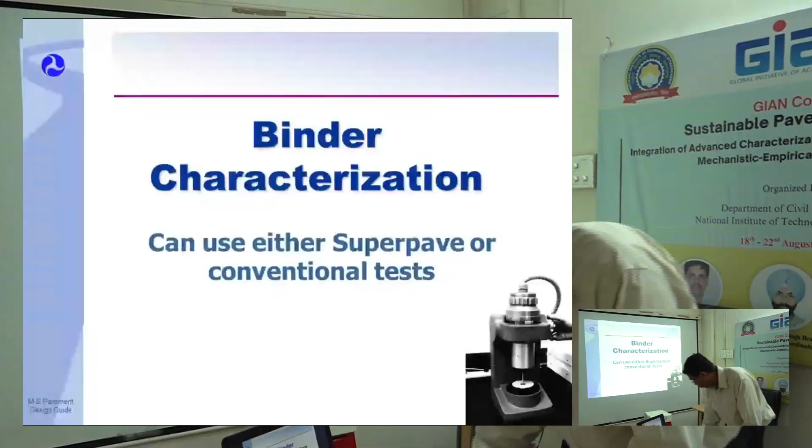Alright, I'm going to go ahead and keep going through the binder characterization. Here you have asphalt as viscous versus elastic - you have an elastic solid here, and a viscous fluid there. That's what you're dealing with in asphalt characterization, and A-VTS correlates viscosity with penetration.

Both viscosity and penetration, it is dependent on temperature, rate of loading, and aging. As temperature increases, viscosity drops. As rate of loading increases, the viscosity or stiffness increases, and aging affects the binder viscosity-temperature relationship.

How to convert binder stiffness data at different temperatures using equation 2.0. Here, A-VTS - there is a simple viscosity equation for temperature susceptibility. And here, dynamic modulus - I'm going to explain this in detail.

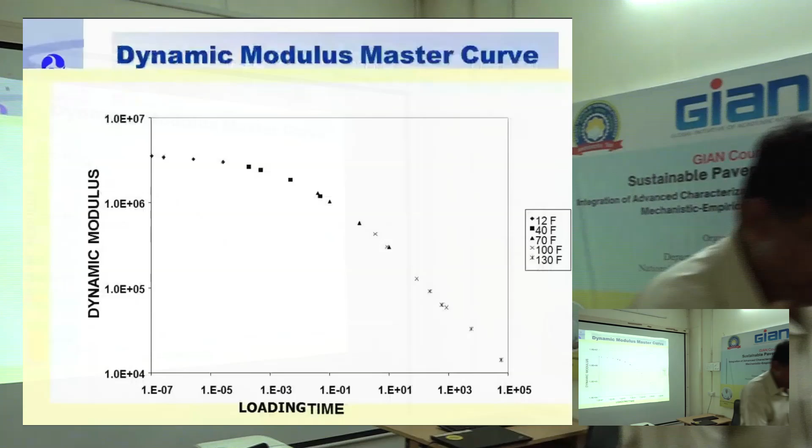All right, dynamic modulus is a very important test. This is done for hot mix asphalt, HMA, at different temperatures. What you do is there's a sample of asphalt concrete. I don't need any confinement, it is not going to fall apart. And you apply vertical load, there is no confinement at all.

What you do is you apply load at a certain frequency, continuous load with frequency or time. And then you have a sine wave, it's going up and down, and you're applying that load over a certain amount of time. Then there is going to be strain, and there is going to be some lag, following the same pattern.

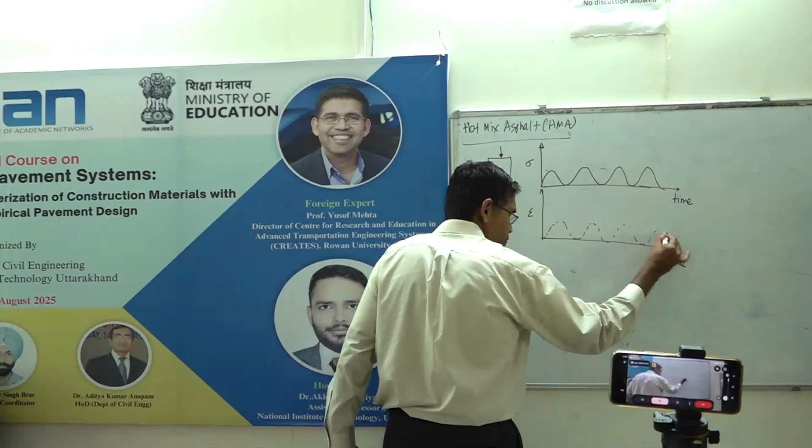So what you will see is the dynamic modulus is given by, at any point, sigma over this. E star is given by sigma over epsilon, stress over strain. That's your dynamic modulus.

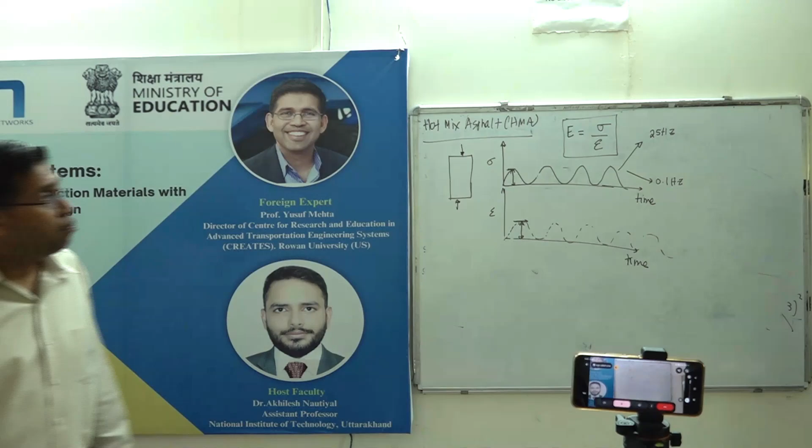What happens is you run this at different frequencies. This can be run very fast, all the way to 25 hertz, and as slow as 0.1 hertz, at different temperatures: 12 Fahrenheit, 40 Fahrenheit, 70 Fahrenheit, 100 Fahrenheit, 130. This is for heavy traffic, fast-moving traffic, and this is for standing traffic, 10 seconds give or take. 0.1 hertz is 10 seconds.

So you have to do this test at every temperature at different frequencies. There's a software, you put it in the machine and you will do that. Now, when you do this test, right here I'm going to plot with hertz frequency, from 0.1 hertz to 25 hertz, and then you have the E star line.

So if I do this data set, at very high temperatures, very low temperatures, asphalt is going to be very stiff because our binder is viscous. But as the frequency goes up, it becomes stiffer and stiffer. At lower frequency it flows. So at high temperatures, it's going to look like this, at 0.1 hertz. This is by frequency, but I can reverse it into time.

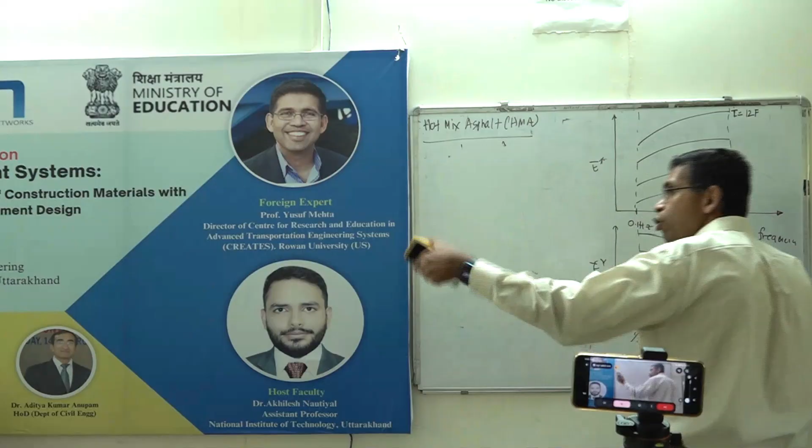1 over 25, 1 over 0.1, and right here this will show exactly reverse, same temperatures. This is 12 Fahrenheit, and all the way, I'm not going to plot all of them, to 130 Fahrenheit.

This is a project one, a level 1 requirement. You have to do dynamic modulus of hot mix asphalt. Now I'm going to explain this very important concept called time temperature superposition, what that means.

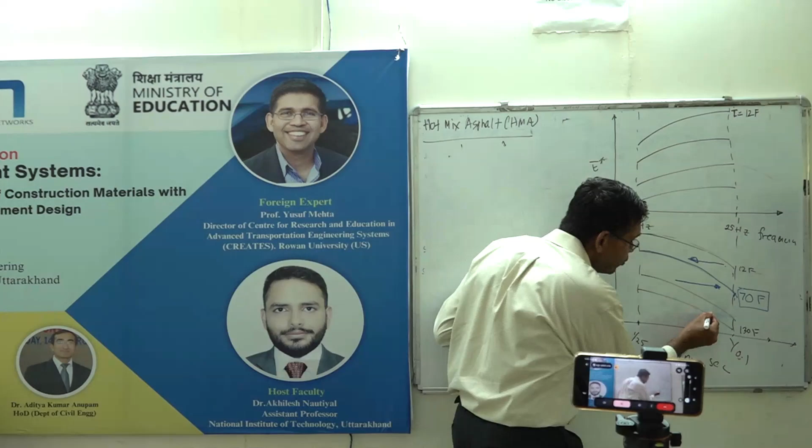Let's say that this is my reference, I'll pick 70 Fahrenheit as my standard temperature, baseline, reference temperature. This is the beauty of asphalt concrete. If I just move this entire curve to the left, because it is colder than 70 Fahrenheit, and move this to the right, because it is hotter than 70 Fahrenheit, does that make sense to you?

Horizontal movement, no vertical movement, completely horizontal. What you will see is that it is true, all of them will directly follow a very smooth curve.

That's what you see there. I'm going to explain the significance of this. It's a very powerful tool.

So I tested from different temperatures. This is my raw data. Everybody understand this? This is my raw data. But my shifted data is not raw data. I've analyzed the data, right? Now I'm going to draw this here.

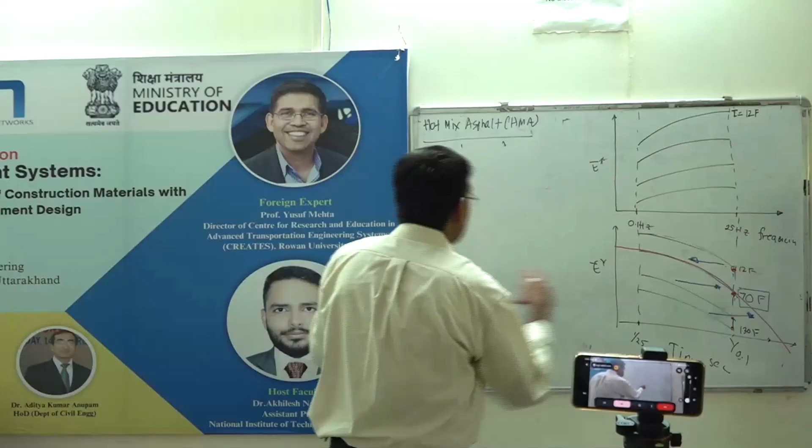Okay, so right here, I have data measured only between these two points, correct? Everybody with me so far? I've only measured between these two points, 1 over 25 Hertz and 1 over 0.1 Hertz, correct? That's the only real data.

But I shifted this left and right and I got this data set right here. Everybody with me so far? This is what temperature? 70. Only 70 Fahrenheit now.

Only one real data set exists between these two points. That is the real measured data. Now look at the beauty of this. Did I test anything, this is 10 seconds, correct? I did not test slower than 10 seconds. Everybody with me so far?

But if I extrapolate this, this could be as high as 1,000 seconds. Everybody with me so far?

If I did not go faster than 25 hertz, right? But if I went all the way, then this could be as much faster than 1,000 hertz. Extrapolated data. Look at the beauty of this. To test the material at 1,000 hertz is pushing the limits of the equipment.

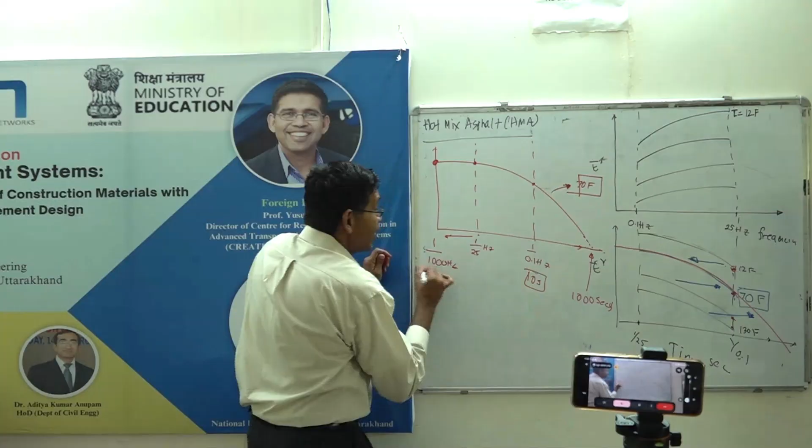Very expensive to do, alright? But I could be very smart by just measuring the material at 12 Fahrenheit. I can get the data of 70 Fahrenheit at 1,000 hertz, or 70 Fahrenheit at 1,000 seconds. That means I don't have to wait 1,000 seconds.

Remember, I can shift anywhere. I just took 70 Fahrenheit. I could have done this entire master curve at 12 Fahrenheit. I could have done this entire master curve at 130 Fahrenheit. Can everybody see the difference here?

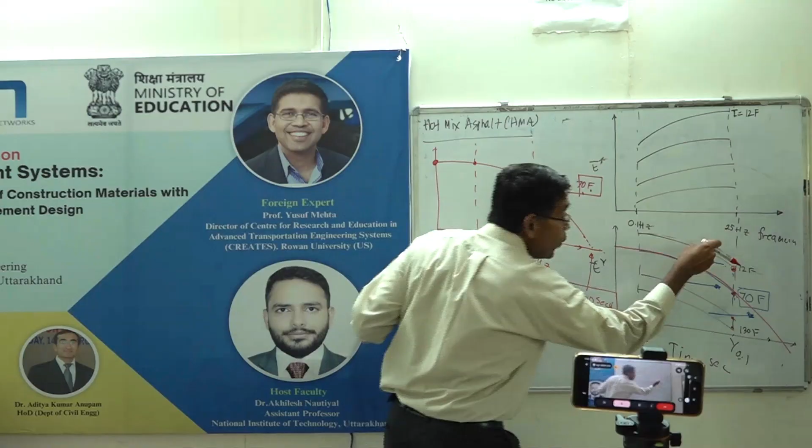So I have the ability to take any temperature, any frequency, just by doing a range of temperatures at a short interval. This phenomena is called time temperature superposition. I'm going to explain to you in a much more simpler fashion.

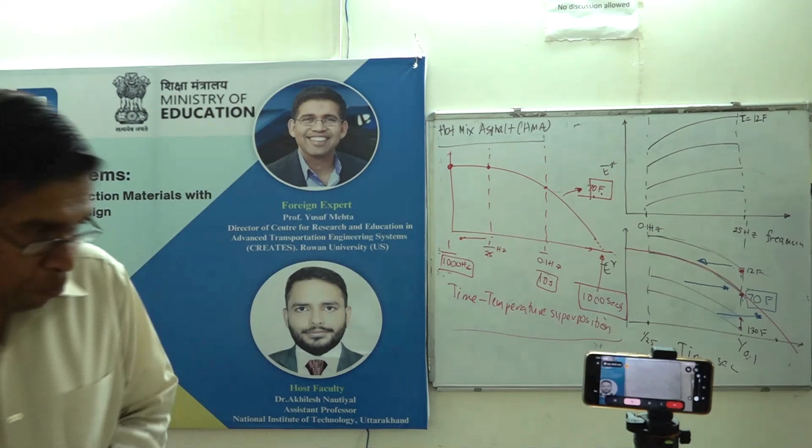Let's say what this means is this. I hope I can do a better job at this. If I take this material, 70 Fahrenheit material, I want you to physically understand what this means, and I load it for 1,000 seconds, it is going to deform a lot.

It's almost equivalent to heating up to 130 Fahrenheit. Same impact, as if I'm heating the sample, or if I stood on asphalt here for 1,000 seconds, is as if I'm lighting a fire under the asphalt.

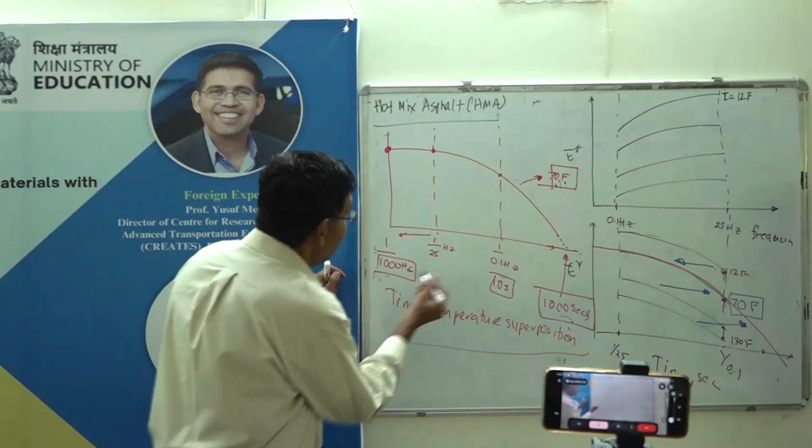That's what it means. On the other end, if I test the same thing at 1,000 hertz, it's equivalent to me doing what? If I test for 1,000 seconds, it's equivalent to me heating more than 70 Fahrenheit. What does this mean?

Very less temperature, yeah, cooling it. It's almost equal to cooling it. But look at the beauty of this, right?

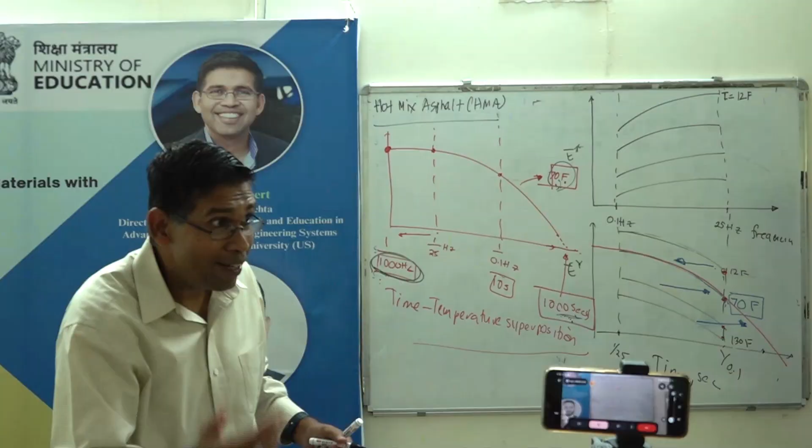I can also reverse the logic if I don't have a freezer, if I don't have a cooling methodology. So I can even go backwards and do the inverse. Like, okay, I don't have a freezer in my facility to put 12 Fahrenheit. What will I do instead? Test at the higher range. It's completely interchangeable.

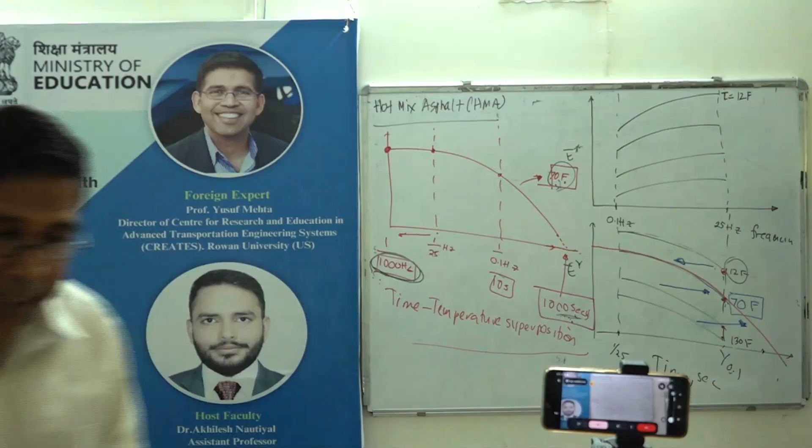So we do this all the time. If a student comes, oh, Dr. Mehta, I need data at minus 50 Fahrenheit. Oh, I don't have a chamber for minus 50 Fahrenheit. What do I do? Test it at a faster range. You got it? So you can be very strategic.

It's like, so in asphalt, you can get the data, and this is scientific, this is not empirical. This is material property. This is called time temperature superposition. And that is very powerful, to measure at any temperature and any frequency, I can get this.

Is everybody with me so far? That's called the master curve. Okay, so you can see this number, 10 raised to minus 7 loading time.

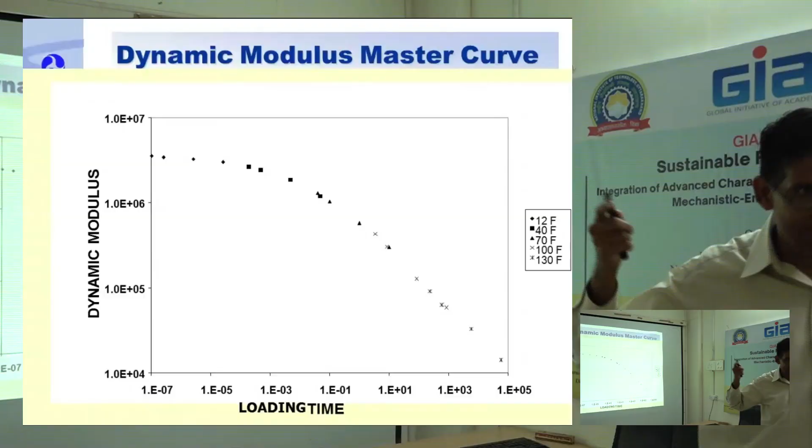Can you imagine how fast that is? 1 over 10 raised to what? 10 crores? 1 crore, right? 1 crore is 7 zeros, right? 7 zeros, right, okay. So like that fast, who does that fast? Impossible, right? Not possible. That machine has to be very powerful to test that.

All you did is you tested at 12 Fahrenheit and you got the data extrapolated. Look at it, 10 raised to 5 whatever seconds, that's a lot of time, that's 100,000 seconds. But now, without testing it, I got the modulus because I tested at 130 Fahrenheit. You got it? Everybody with me so far?

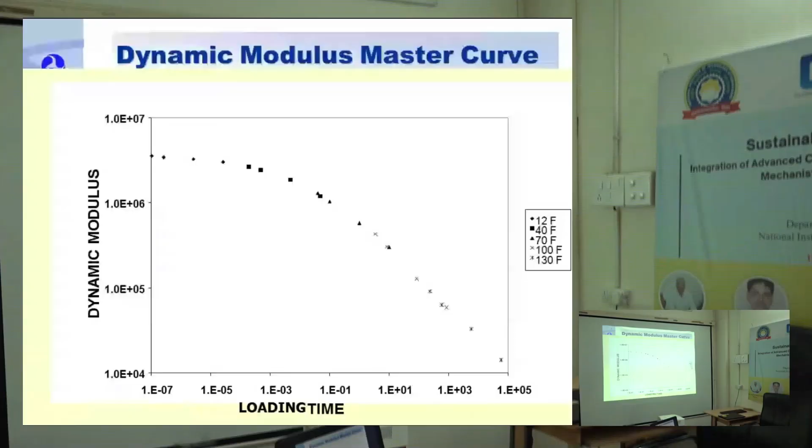Did I have any questions online about this?

Now, there was a question online about what do I do with this information? Okay, I'm going to explain it.

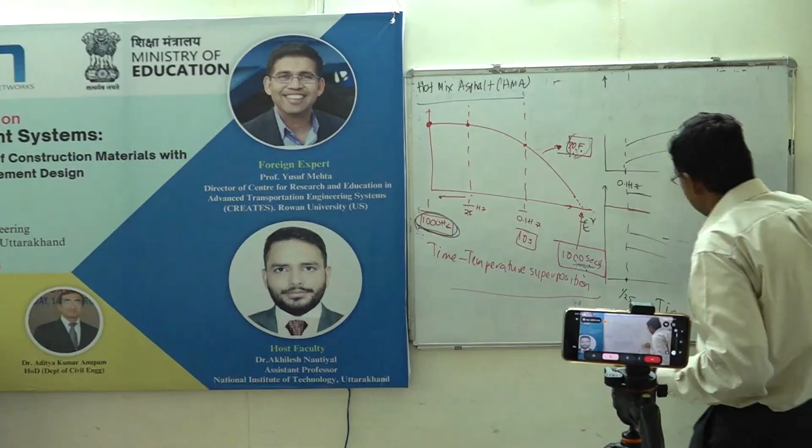Again, I come back to the 15-day period. There's a question: how can I take dynamic modulus? For that 15-day period, I have a daily distribution, I have axle load distribution, and I have speed of traffic. I have temperature from weather data.

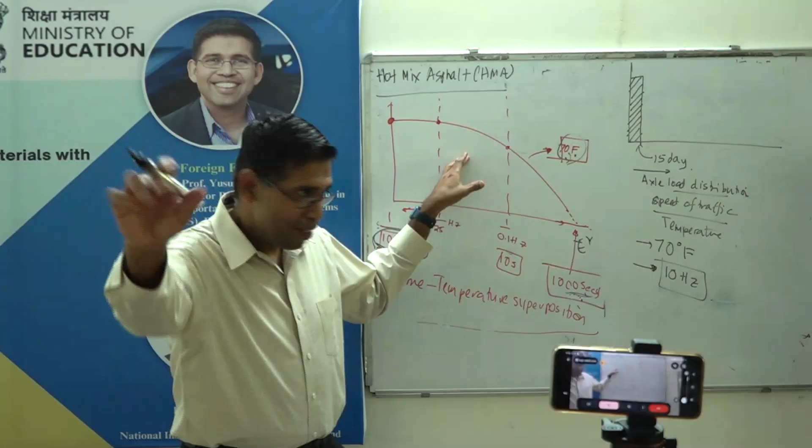Let's say now, today, what is the time? 11:15. Temperature is 70 Fahrenheit, a truck is coming at 10 hertz. What can I do? This is in the database of the MEPDG. The moment it sees this, it goes into this 70 Fahrenheit, 10 hertz, it picks this number. That's my E value, E1.

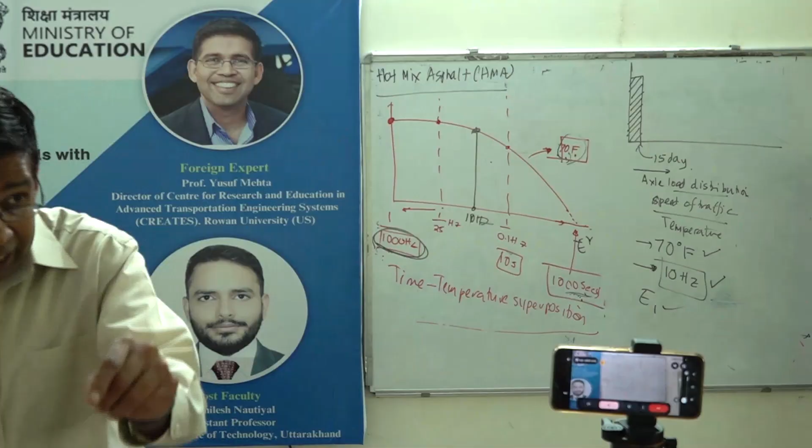So there's a question asked: what is the difference between elastic modulus and dynamic modulus? This I can now use for any temperature. In the winter, it becomes 12 Fahrenheit, 1 hertz for tipping traffic, it can pick that number right there. See the beauty of that? So it picks the elastic modulus from the dynamics at any frequency, any temperature, the appropriate number. That answers the question: how can dynamic modulus be translated to elastic modulus? That's an excellent question, that's what it is. Does that make sense? Everybody understood that?

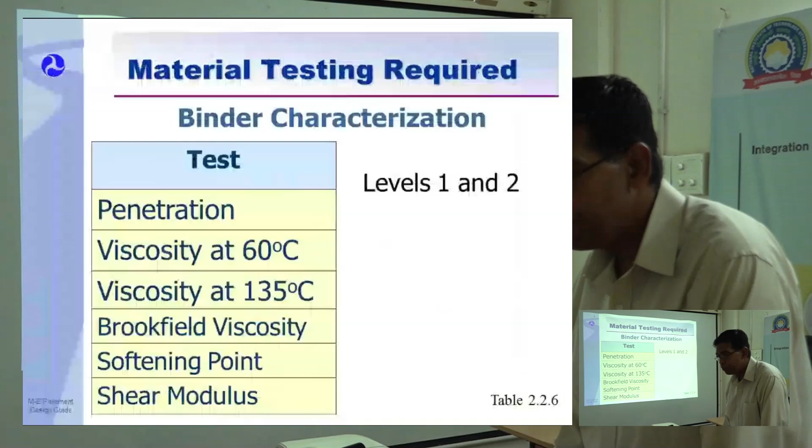This is the DSR, I know we have a DSR here, I just saw the machine. You get the fixed plate going back and forth, and then you get G star, and you get the time lag, G star sine delta, or PG grade. You guys measuring PG grade right here? Right here, level 1. This is a nice way to look at it.

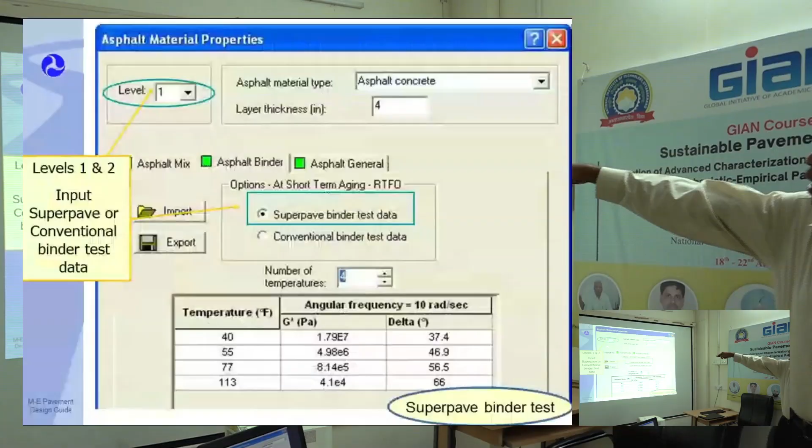Level 1 is the highest level, right? Asphalt concrete, you can use superpave binder test. Different temperatures - 40, 55, 77, 113 - and then you have different delta, phase angle. Phase angle is elasticity. If the phase angle is 0, then it's completely elastic. Phase angle of 90 is completely plastic. And of course, asphalt is closer to 90, so it's not elastic. Asphalt concrete is more elastic than asphalt binder. Why?

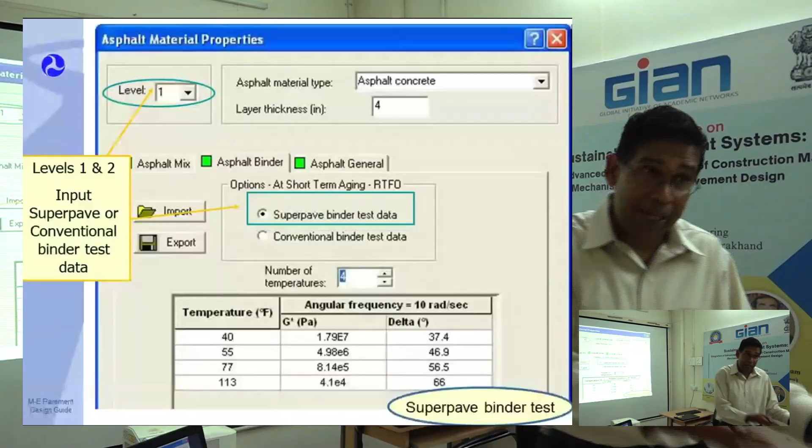Asphalt concrete, hot mix asphalt, is more elastic. If I got the phase angle of hot mix asphalt, it will be around 45, 50 phase angle. Why? What is an asphalt concrete? Aggregates, right? And what is aggregate? Aggregate is more elastic. Binder is only 5%, aggregates is 95%. So you have 95% of elastic material, 5% of this. Of course, the hot mix asphalt is going to be more elastic than the asphalt binder. The aggregate combining with the binder is elastic, more elastic than the binder. That's what you asked, that's what it is.

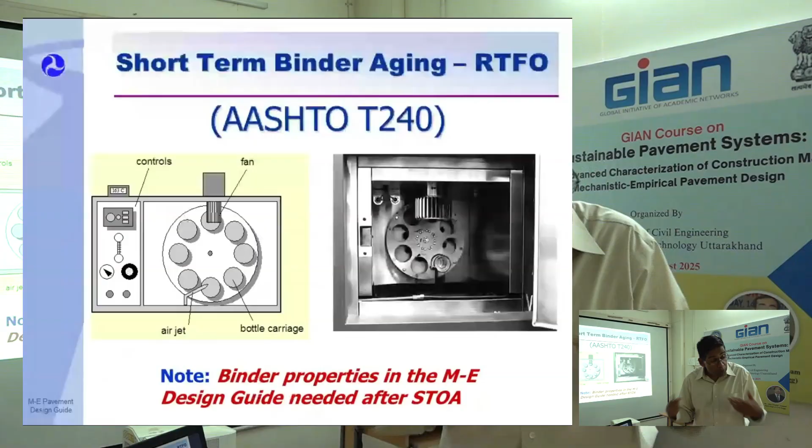Then you can just use superpave binder grading, PG 76 minus 22. You can pick that and then get the A, VTS. Now you can use superpave binder grade, you can use other information. Then you can do RTFO, rolling thin film oven, to look at aging. So you can get the binder properties in the design guide using short-term aging. Are you aware of this? You put hot air at 163 Celsius for 85 minutes, and it will age. It simulates aging during construction. That's why the word short-term aging, short-term oven aging.

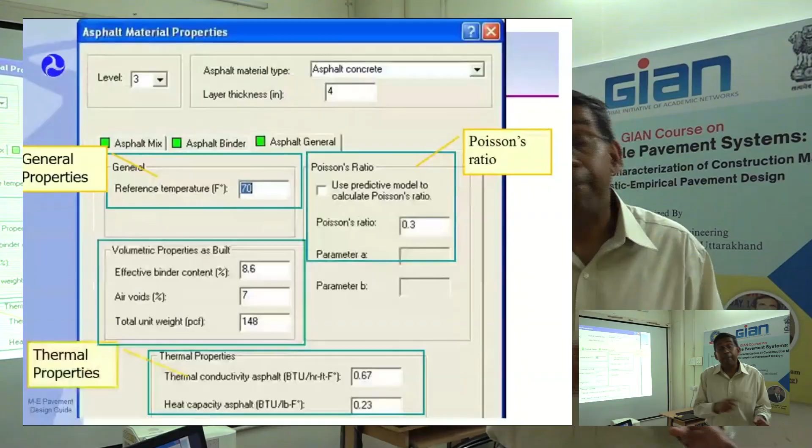Asphalt mix characterization - that's your dynamic modulus right here. Reference temperature 70, you can pick your own reference temperature. Binder content is by volume, not by weight. By volume, binder content is twice that weight. So you are used to 5%, 5.5%, but by volume it becomes exactly double, so by volume it occupies twice the volume. And then you have the thermal conductivity. Why not?

If you're not going to do the testing, you can do level 3. You have to put the gradation: number retain 3/4 inch sieve, 3/8 inch sieve, number 4 sieve, and then passing number 200 sieve.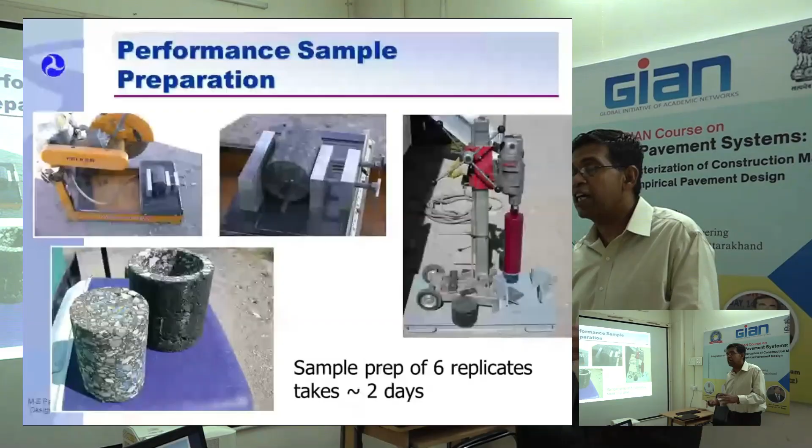And then right here is the sample of 6. You're putting this out, and then you have to cut it into the right sample. The ratio is 2:1, so if the diameter is 4, the height has to be 8, and so on and so forth to ensure you don't have edge effects.

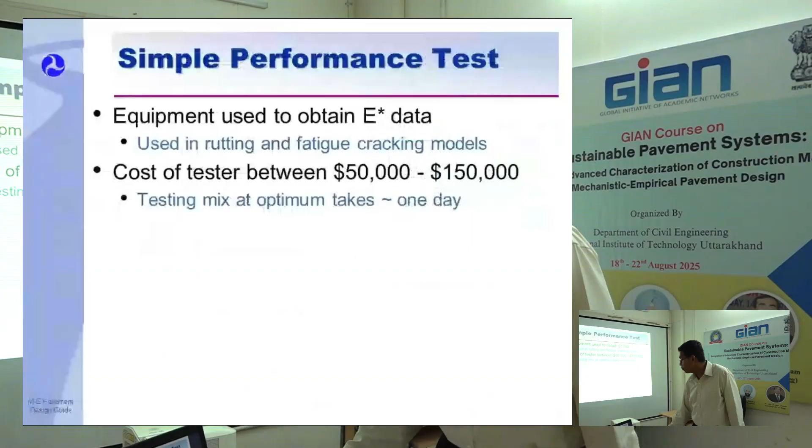Yeah, so remember, it's pushing that. Cost of the test is between $50,000 to $150,000. That's the machine, that's the whole machine of doing it.

That's the test I just explained. You have to do a sinusoidal test, and then you get sigma over epsilon, and you get elastic modulus. Right here, you don't need any confinement, it's a bound material. You have to put sensors in each direction, 3 sensors, and it gets your strain value, and that's what it is.

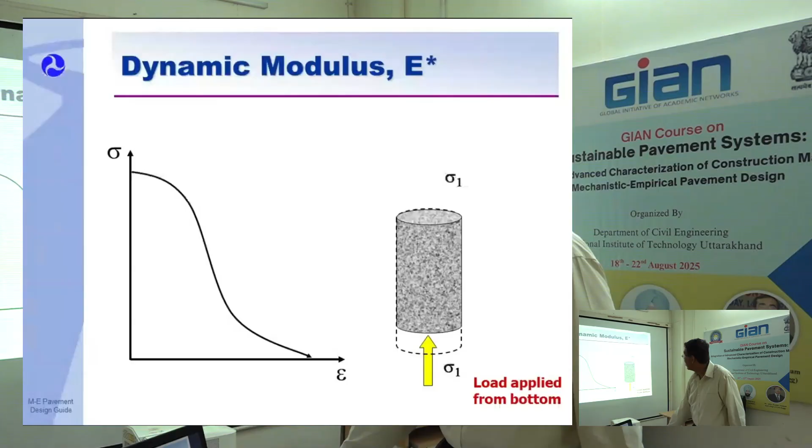Here, load applied, right here, test for strain. Rate of loading relates to different time at different temperature to get the same response. That's the same thing: I can superimpose temperature and loading rate of testing to get the same response.

I'm putting my question. Which was the traffic speed and temperature from the field using the existing dynamic modulus master curve that was built in the ME analysis tool. It uses corresponding dynamic modulus for those 15 days. So here we need speed and temperature, but previously we discussed calculating resilient modulus from the layered elastic analytical process. Then that resilient modulus we are not using anywhere here. So am I missing anything?

Yeah, I think this is the resilient modulus. The dynamic modulus at a given temperature and frequency for asphalt is the resilient modulus, so it is the equivalent resilient modulus for asphalt concrete. The resilient modulus in AASHTO 93 was very different, so you are now transitioning from AASHTO 93 to Pavement ME or MEPDG. So that resilient modulus I kept talking about up to this point for asphalt has now become dynamic modulus for AASHTO. So you're not missing anything. The only difference is that the dynamic modulus at a particular frequency and temperature is the resilient modulus, or the E value that will become the input parameter. I hope that answers your question.

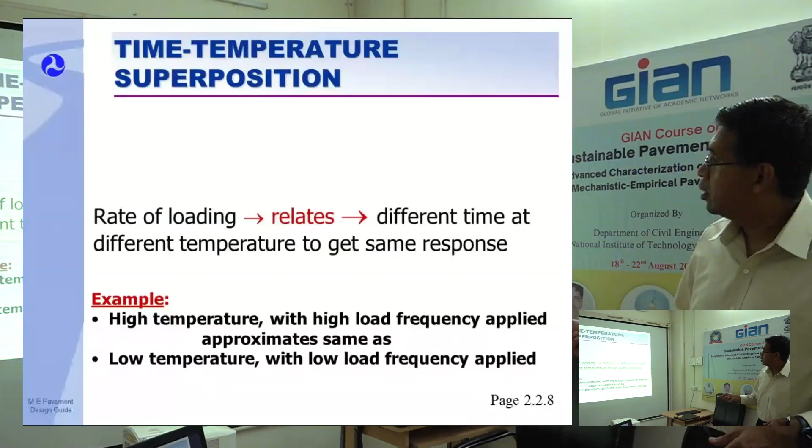Next one: high temperature with high loading frequency is the same as low temperature with low frequency, right? So if you increase the temperature and you increase the frequency, it will give the same response as low temperature and low loading frequency. That's exactly what I explained there.

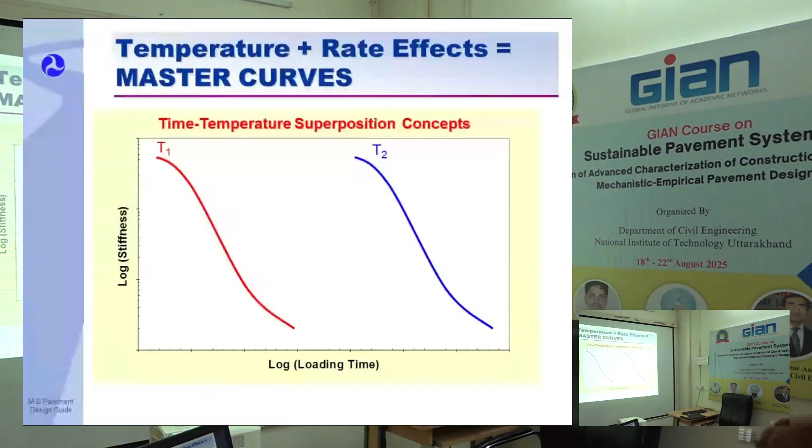Right here, this is more graphics for you. So right here, you have temperature 1, you have temperature 2, right? Temperature superposition, you can move it horizontally, right? Not vertically, you cannot change that. Horizontally, you can move on both sides. This is log versus loading time. That's what I just explained.

And you move to the left if it is colder, it will move to the right if it is warmer. So you can move to the right and you get one reference temperature. You can do multiple temperatures, and then you can shift. The shift at reference temperature is 0. The shift at other temperatures is left or right - that's your shift factor. That's a lot of other math there.

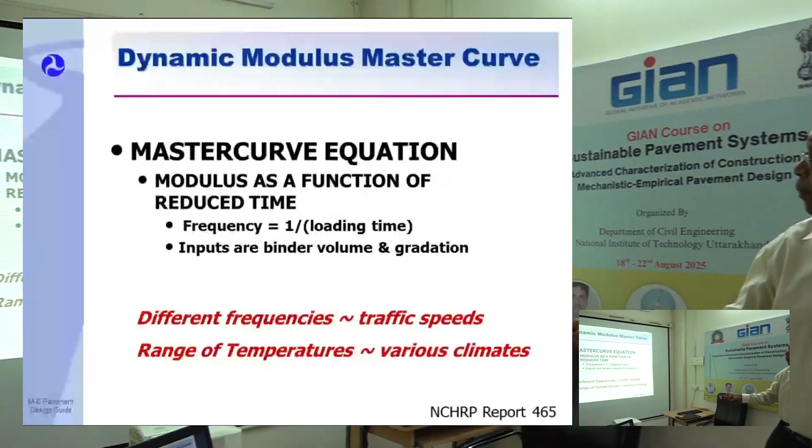So master curve, okay, got it. Okay, good. Different frequency is traffic speed, I just explained that, right? Range of temperature is various climates, that's exactly what I said. Remember, the temperature I picked up today is different - if you go in January, it'll be a different temperature, and it automatically takes from the weather data.

So you're going to have to understand where the pieces are coming in, right? If you start to blindly use the software to spit out some number, you will not appreciate it, right?

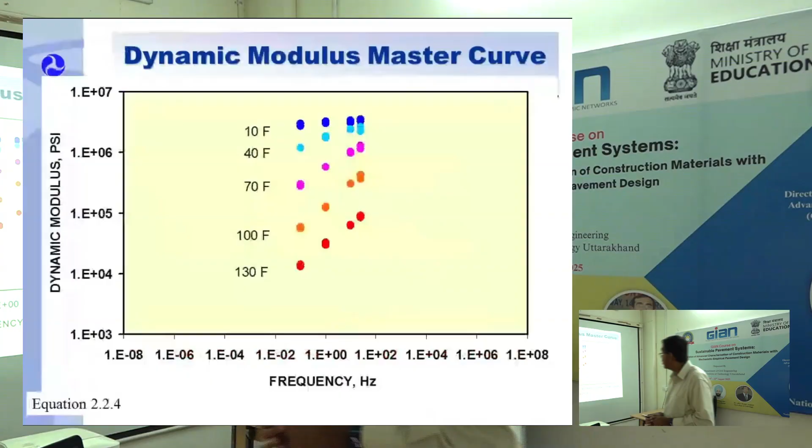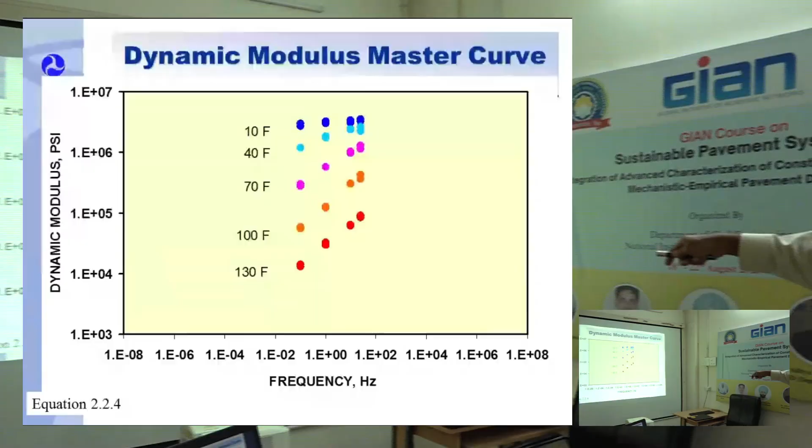Right here, this is a very good graph. Right here, this is actual data: 10 Fahrenheit, 40, 70, 100, 130. So as I make it warmer, my dynamic modulus drops because asphalt flows. If frequency goes up, if I load it faster, my modulus goes up. So from 0.1, I think that's what I said before, to 10 seconds, same amount is right here. And then you shift horizontally and vertically, convert frequency to time, and you get this equation.

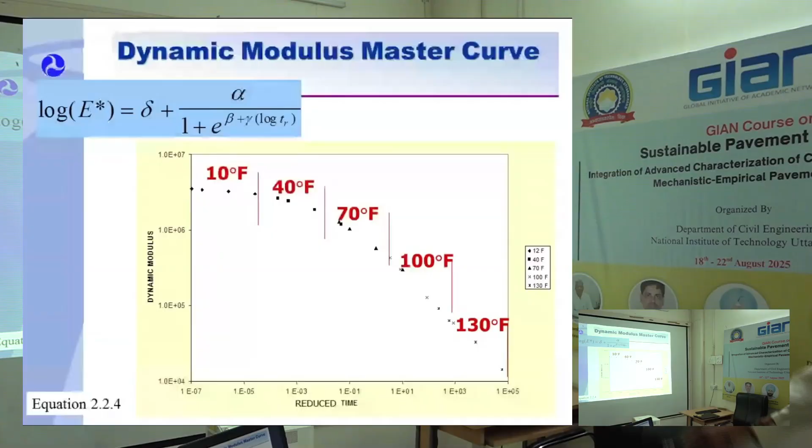Any questions for me so far?

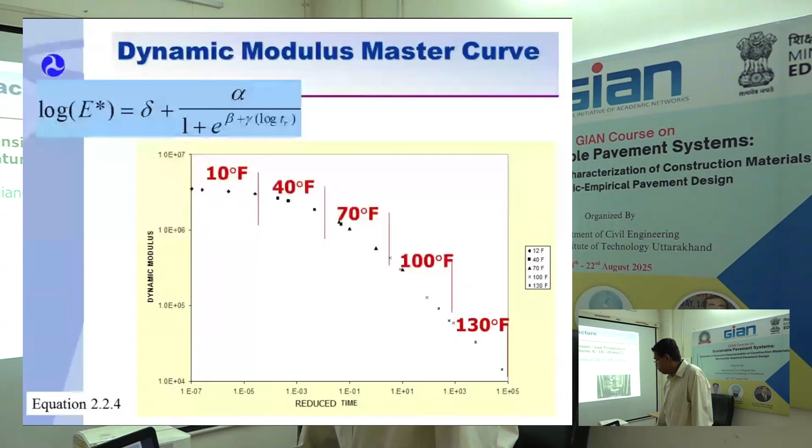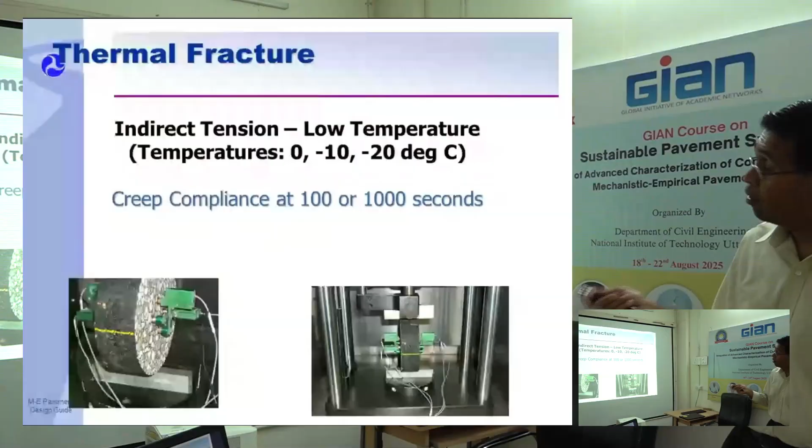All right, now we are going to cracking, completely thermal cracking. From there, going to thermal cracking, right here. Creep compliance at 100 seconds. This was done at Penn State, part of my thesis. When I joined Penn State, Superpave was almost completed, and one of my tasks was to develop this test procedure for thermal cracking.

So right here, this is done at -4, 14, and 32 Fahrenheit. 32 Fahrenheit is how many Celsius? 0 Celsius, right? So -20, -10 is... -20 Celsius, -10 Celsius, 0 Celsius.

Okay, I'm going to explain this test procedure before I move ahead.

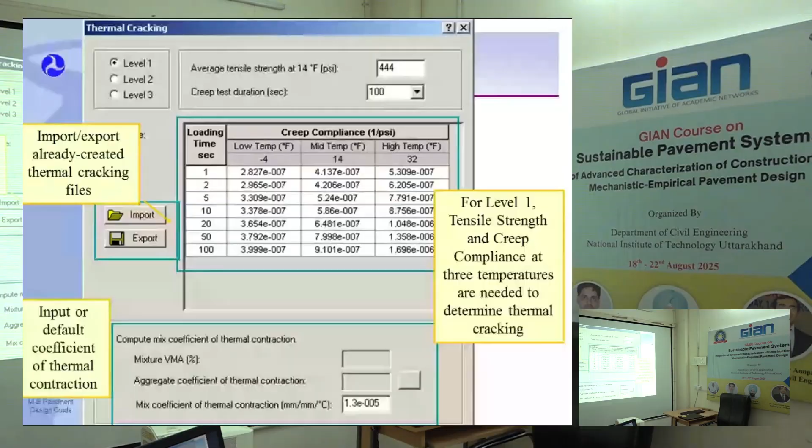I'm going to just remind you how thermal cracking is caused. We did this last time, so I'll do a quick review. It happens when you have a cold front, right? I'm just doing a quick recap, this is very important so I can explain this better. So here you have a cold front, and you have tensile strain going up as temperature drops.

Now you have E goes up as delta temperature, as temperature drops. So the combination of the two, I told you before, is the stress. Temperature drops, and then you have this, and then you have strength. And that's your critical cracking temperature.

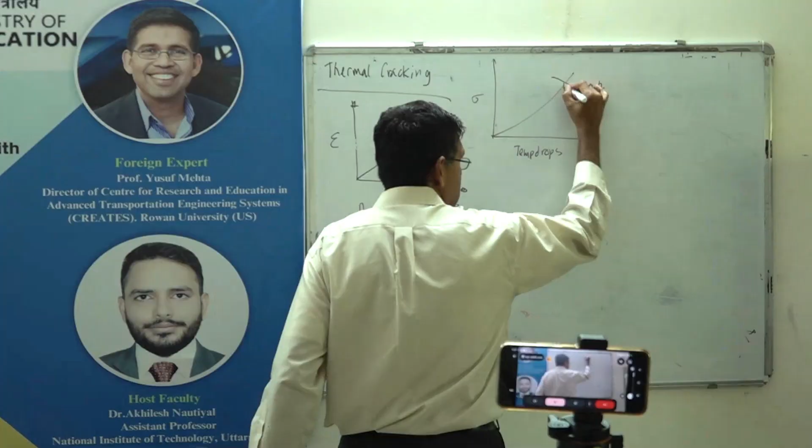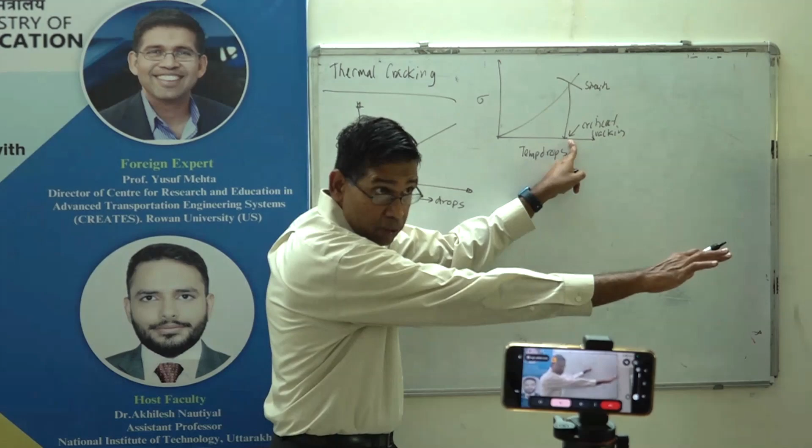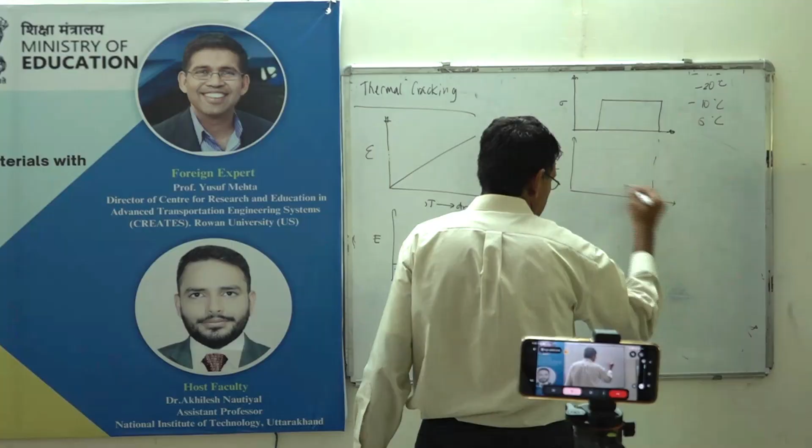Let's look at this. What you do is, you take a load, you apply it for a certain time. It's very cold temperature, we already discussed this, minus 20 Celsius, minus 10 Celsius, and 0 Celsius. And then you measure strain, again very indirect tensile strain, and it's going to go something like that. Because over time, this is time equal to 0. I forget how many seconds, 100 seconds, right there.

Fair enough? It creeps, you have this, and you have something called compliance. D is 1 over E, which is epsilon over sigma, because sigma is constant and epsilon is changing. So my compliance will increase with time, and now you do the same thing from 0 seconds to 100 seconds. Compliance D of t, which is 1 over E of t, if you don't know what is exactly inverse, I will do this, inverse of stiffness.

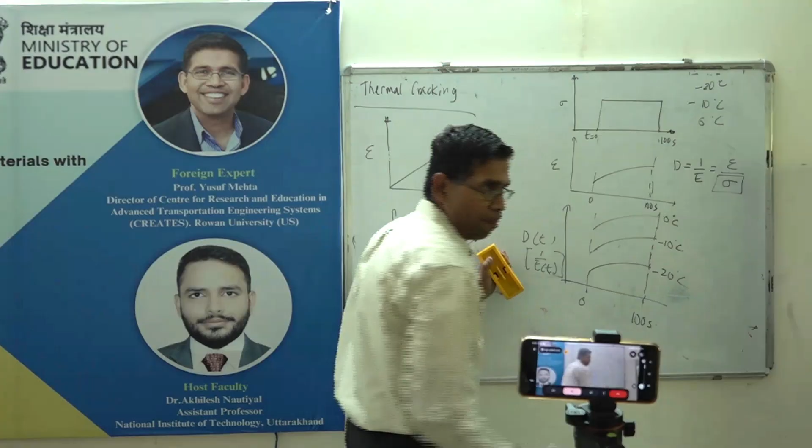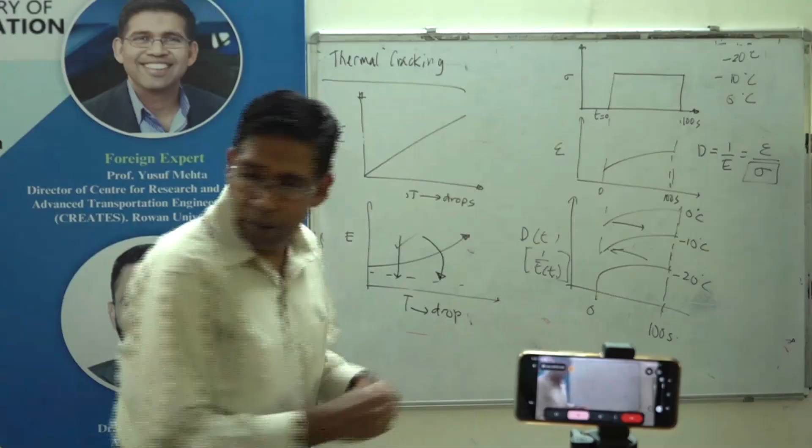Okay, so this is 0 Celsius, minus 10 Celsius, minus 20 Celsius. So it is softest at 0, least soft at minus 20. Now you can do the same thing, time temperature superposition, all of that is exactly the same. That's what the 3 data sets give. So I can now calculate this master curve with time, which I can translate to temperature, which I just explained to you. Time and temperature is interchangeable, so if I get the time, I can easily change it to temperature, and this is what I'm trying to do.

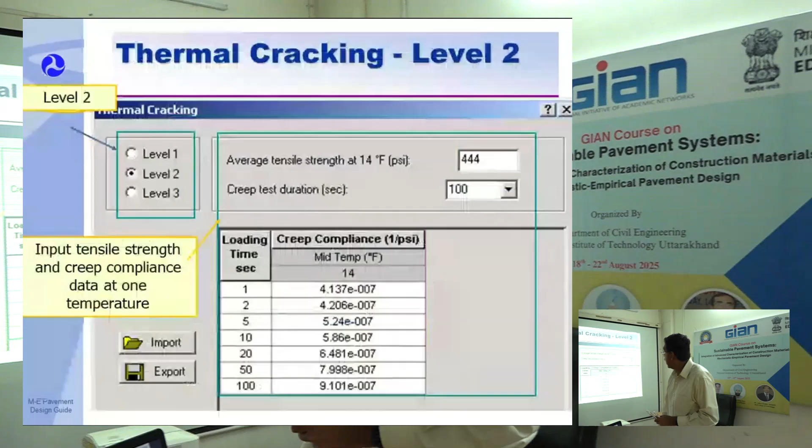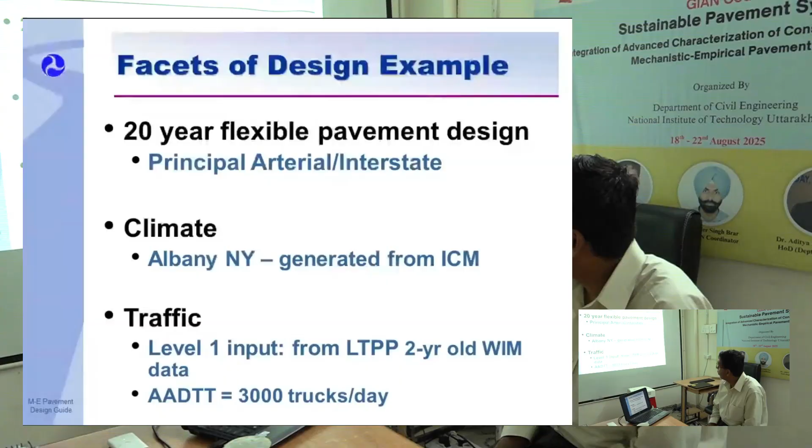AC surface layer 2 inches. AC base layer 4 inch. Subgrade base A1A, subgrade A4. Got it, everybody? Simple pavement structure.

All level 3 inputs used. No dynamic complex measured, right? IR.

This is a good one. 63 inches per mile is the initial IRI. This is same as 1 meter per kilometer. This means a perfectly smooth roadway. Remember, yesterday I did 1 meter per kilometer. This is 63 inches per mile.

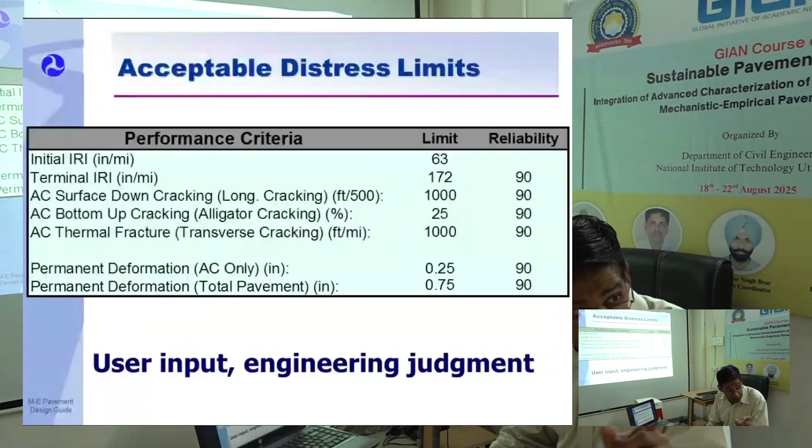Failure at 172 inches per mile. Everybody with me so far? I want to take the time to explain this.

AC surface cracking 1000 feet per 500 feet. 25% bottom-up cracking, thermal cracking 1000 feet. AC rutting 0.25, total rutting 3/4 inch. These are the requirements of the pavement end.

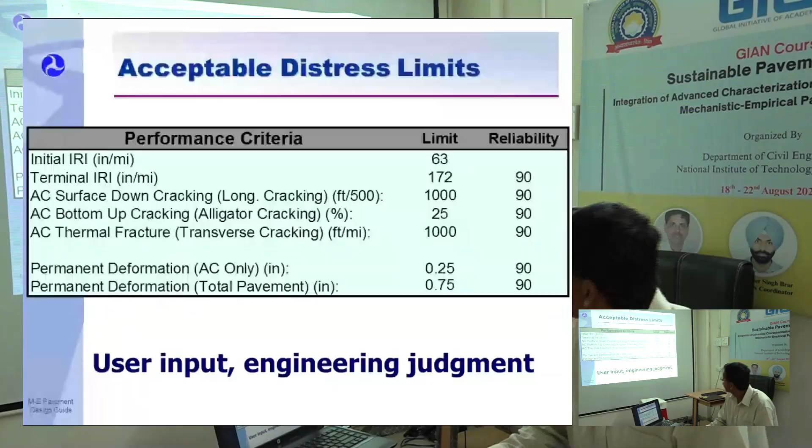90% reliability. Remember, I told you if you increase the reliability, it will over-predict the distress.

Superpave binder grade 64 minus 28. Baseline mix design is here. Two binder contents, 70 minus 28, 58 minus.

If it stays above minus 28, it will not crack. 58 minus 28.

Good? You're good? Which one is softer - B or C? C. B. C. C. Yeah, B cannot be softer - it does not rut at 70 Celsius. How can it be softer? So C is softer, correct? Because it does not rut at 58 Celsius.

So if you go 82, 86, 88, it goes in. Yeah. Air voids, 4% versus 12%. Simple sensitivity analysis.

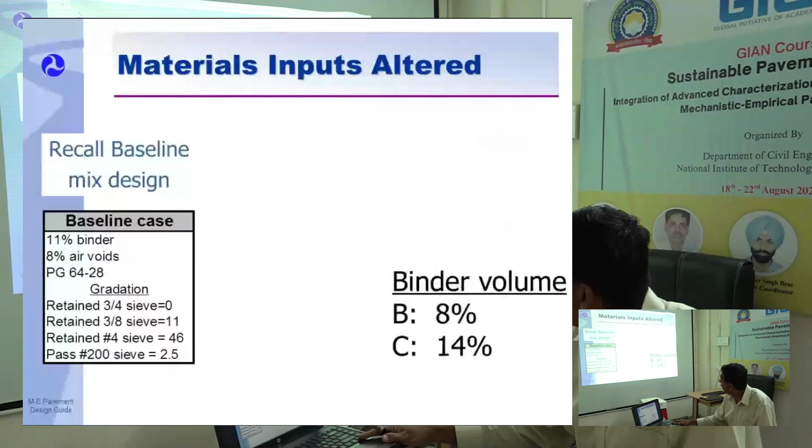Binder volume 8% by 14%. Remember, we started with the baseline. Certain baseline - gradation is given to you.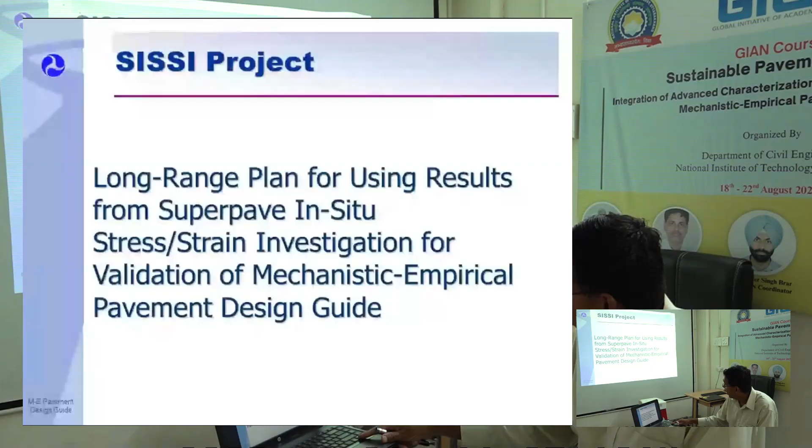Local calibration - that was the question that came up. You have to locally calibrate, and then every state has to calibrate on their own. We did that for fatigue cracking in 2008 for New Jersey DOT. You have to do in-situ stress. They did that project in Pennsylvania. They are doing all of them. This is a very old slide. This project is finished.

We did level of inputs, asphalt lab testing, design guide analysis, and sensitivity analysis.

Questions for me? Any questions online for me? No, none so far.

Anything else you want me to cover in terms of the slides and supplements? I'm trying to look at any other material plans and introduction.

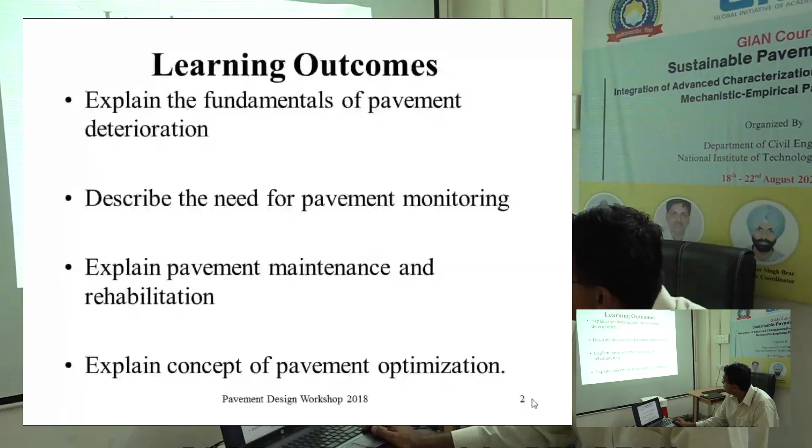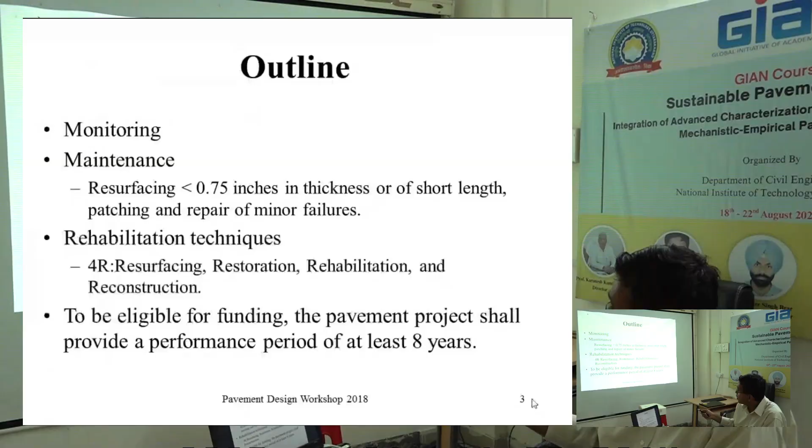So just looking at deterioration, pavement maintenance, and rehabilitation - a little shift from pavement ME design. Describe the need for pavement monitoring, maintenance, and rehabilitation, and the concept of it. The US is completely moving to pavement preservation, to come at the right time and preserve the pavement. Monitoring, maintenance - resurfacing is very, very expensive. So you want to come back within less than 0.75 and repair the pavement. For rehab: resurfacing, restoration, rehabilitation, and reconstruction. You want to avoid reconstruction as much as possible.

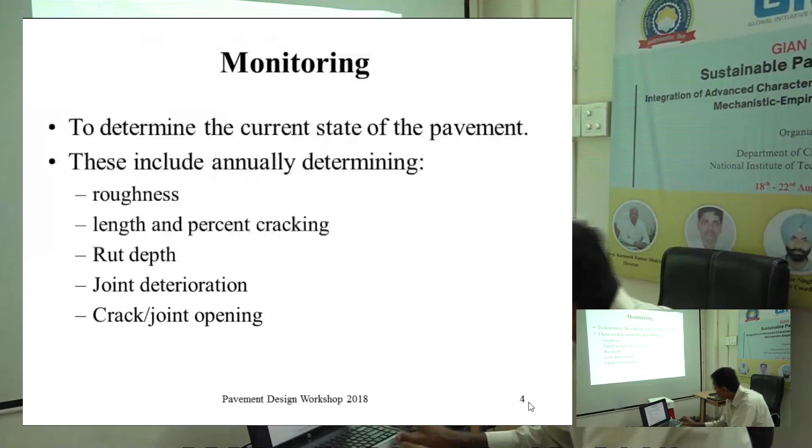It's very expensive, so to be eligible for funding, the pavement project shall provide a performance period of at least 8 years. The requirements to determine the current state of the pavement determine roughness, length, and percent cracking - PCI, I apologize for that, PCI. Joint deterioration, cracking, and joint opening - you're looking at distress per mile. Deterioration of joints per mile goes up, cracking goes up, faulting increases, PSR or PSI goes down. You have pumping keeps increasing, or rut depth keeps increasing, as the design wears down.

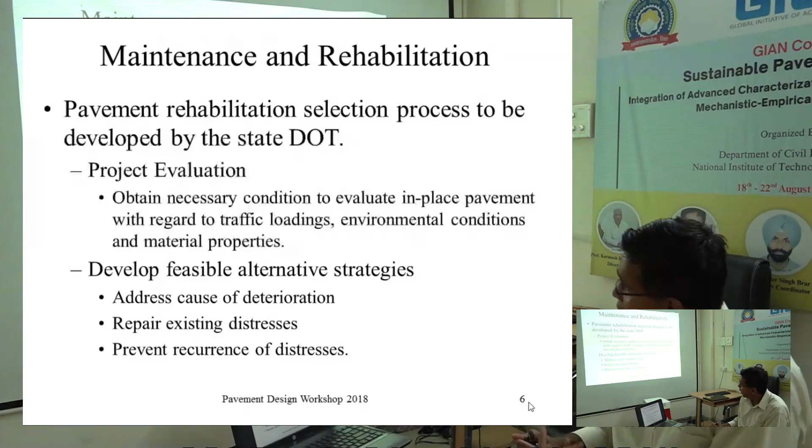Pavement rehabilitation selection process has to be developed by the state DOT. You have to determine and evaluate in-place pavement with respect to traffic loading, environmental conditions, and material properties. You have to develop feasible alternatives to account for deterioration, repair existing distresses, and prevent recurrence of distress. You have to do project level analysis and network level analysis. You have to conduct analysis for expected performance, and then do economic analysis for service life, initial cost, maintenance cost, and future rehabilitation. And then you have to find alternatives.

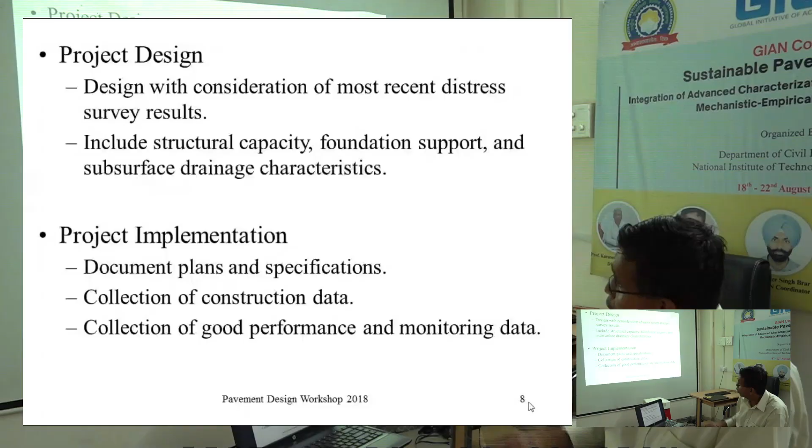You have to design with consideration of the most recent distress. You have to include structural capacity, foundation support, and subsurface drainage characteristics. And you have to document all the data - construction data, and good performance data.

Most pavement construction is rehabilitation of existing pavements. Full depth construction is expensive and unnecessary. So if you do not come in at regular intervals, you will have an issue. You have to do remedial action and come back and get that PSI up to 5 as soon as possible.

This is the one - I like to show this graph right here. From 4.2 to 2.6, there's the drop. And as you keep going down, this is an overlay. The longer the line, the more expensive. So if I go from 4.2 to 2.0 and try to come back up, it's exponentially more expensive, and that's what we want to avoid. This also is too much. You should come back at around 4 and do a quick repair. If you can keep it up, then just keep it up. Because remember, you don't want to be in this curve at all. If you can prevent that, you will keep the state.

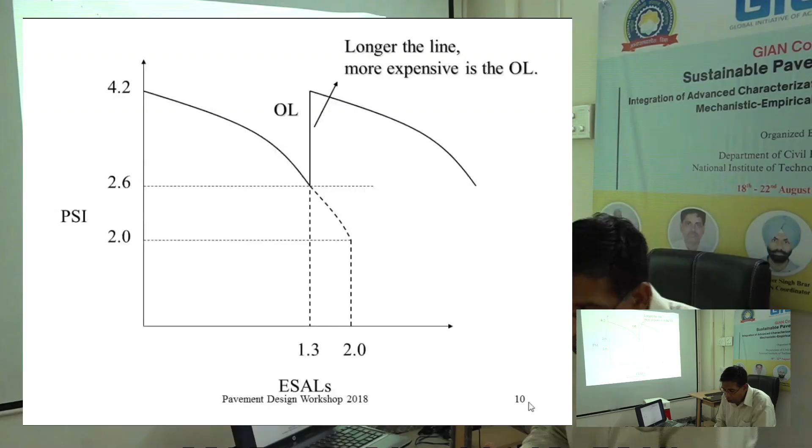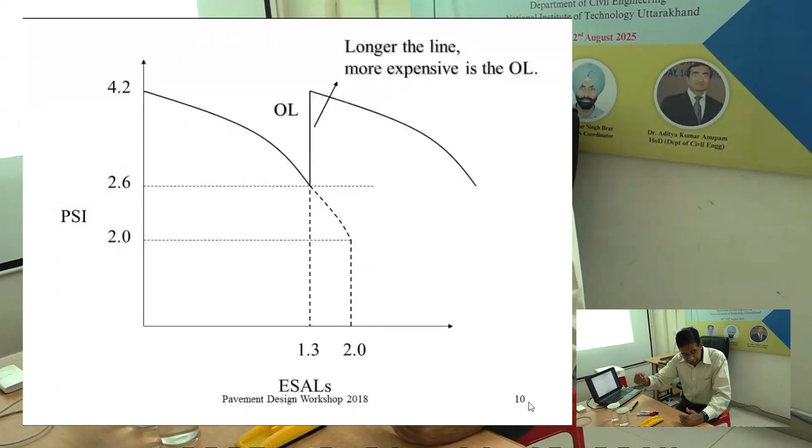So I just want to add a couple of things. New Jersey DOT tells the federal government that they will keep the roadway, the entire network of New Jersey DOT, in repair - in a condition of good, 80% of repair at a state of good condition. They promised the federal government that number. If they fail that number by a certain amount, depending on how much they fail by, their dollars are reduced. If they exceed it, they can ask for more money from the federal government, but there is a process to that. So there are two problems, right?

DOT could cheat and reduce the bar, say instead of 80%, I'm only going to promise 70%. But why give a very high bar, fail it, and not get the money, right? But US DOT notices, oh, you are dropping the bar. You cannot drop the bar. You know what, I will make failure instead of 40, I'll make it 30, 20. You cannot do that, right?

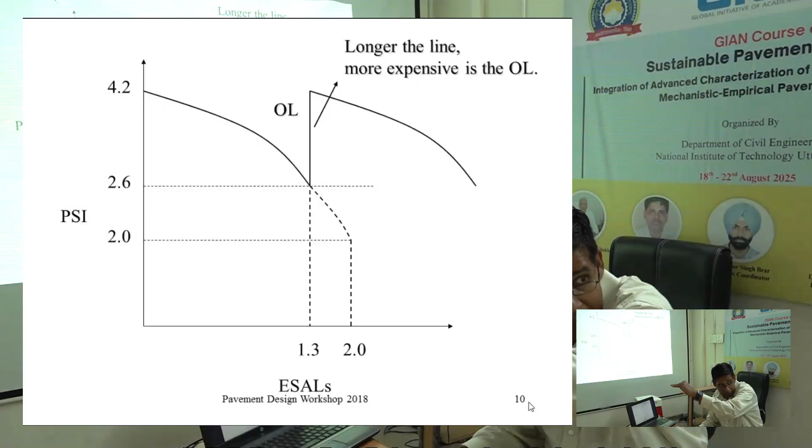This is very critical, and it incentivizes DOTs to come in and repair all of that to keep it in good condition. Otherwise, they will go below that 80%, meaning only 20% of the roadways should be fair or poor. So there's tremendous pressure to maintain that.

That's why New Jersey DOT introduced 15 cents for every 4 liters of tax for traveling people. So they have close to $1 billion every year to keep the condition good. The traveling public demands it.

What is the problem happening now in the future? Electric vehicles are coming, they are not using gas. Batteries are heavier, so the cars are heavier. They're using the roadways but not buying gas or petrol. So what they did is increase the registration fee by $100, $150 for the first 5 years. They are doing all kinds of things because they said, you are using the road, somebody has to pay.

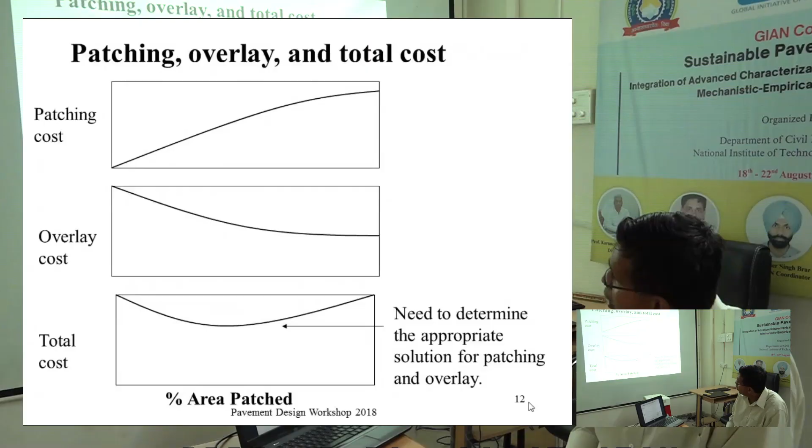Construction of a new structure layer over the road layer requires knowing the existing condition of the roadway, and you have to do applicability testing as well. Patching cost goes up with percentage area patched, and overlay cost also has to be checked. So you have to look at keeping the total cost down.

Sir, like in India you have toll tax and toll booths. Same as in the US, they have toll tax absolutely. I'm glad you brought this up. There are certain roadways that are not funded by the government at all, completely funded by toll roads. The toll is very high, but it's like a fast way, very good.

What has happened with these toll roads, fortunately or unfortunately, is they have so much surplus money because people pay. All they care about is making sure the ride is smooth, because people will complain, I'm paying the toll, I want a smooth ride. They don't want any traffic jam due to construction, so crews come in the middle of the night, construct, and leave.

What is happening is that all these people don't want to innovate. Why innovate, that's not my interest. So when I meet them, they say no, for me this particular mix is working fine. It is expensive, let it be expensive, I have the money. They have no incentive to innovate.

Sometimes it is hurting the industry as a whole, but in their business model, their job is to serve the traveling public who's paying the toll. I have seen the flip side, like they will not use any recycled material, absolutely not, because of too much urgency - what if it fails soon, what if construction crews come in 2 years instead of 5 years? So no recycled material, it has worked against that.

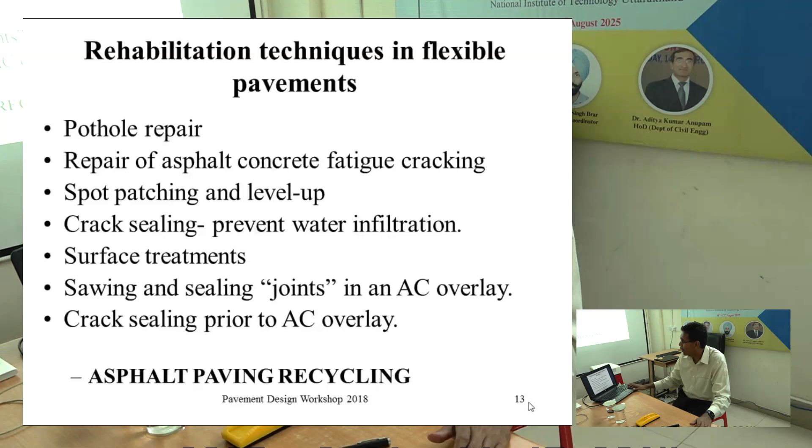I'm glad you brought that up, this thought came to my mind. Pothole repair of asphalt, concrete fatigue cracking, crack sealing, surface treatment, full depth repairs, distress near transverse joints, D-cracking, spalling and faulting of intermediate transverse cracks - these are the techniques. You have to install dowel bars, corrosion-resistant epoxy fillers, stainless steel coating.

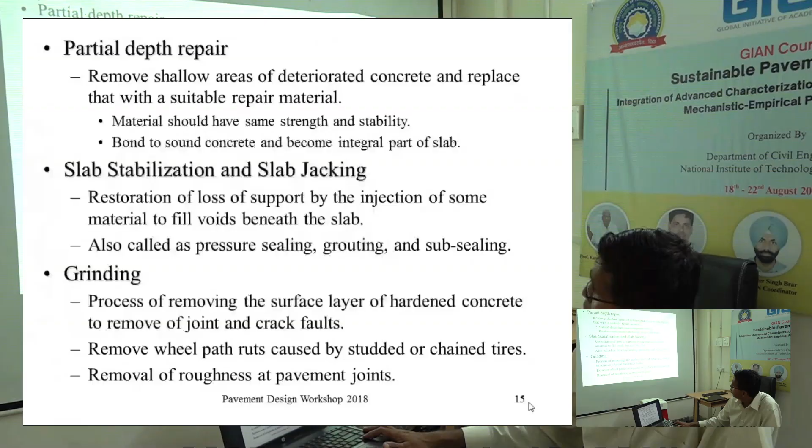Partial depth repair requires removing shallow areas of deteriorated concrete, which should have the same strength and stability. You have to do slab stabilization. There's a whole industry here, and I'm just giving a small flavor. Joint and crack sealing is what you have to do, for transverse joints, longitudinal lanes, all cracks on pavements. These little things keep it at level 5.

Explain the fundamentals of pavement deterioration, monitoring, and pavement maintenance. That's all I have, I think we are ahead of time, but I'll take questions.